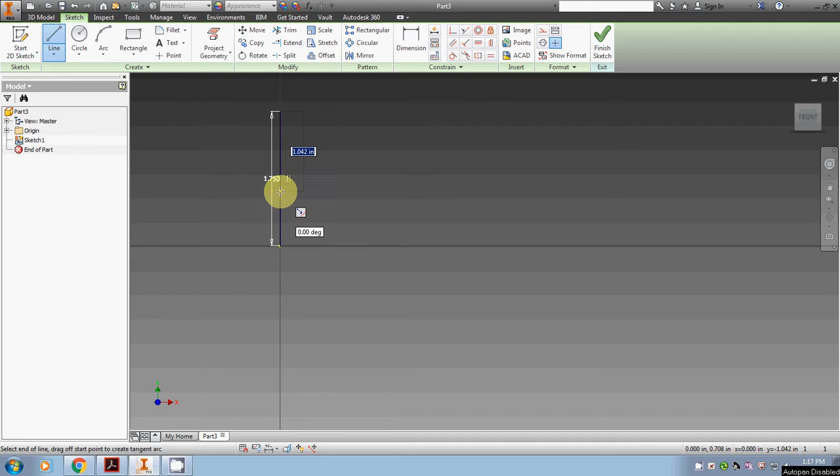So up 1 3/4, over a half, down an inch, over an inch, up an inch, over another half an inch, down an inch and a quarter, over an inch and a quarter, down a half an inch back to the axis.

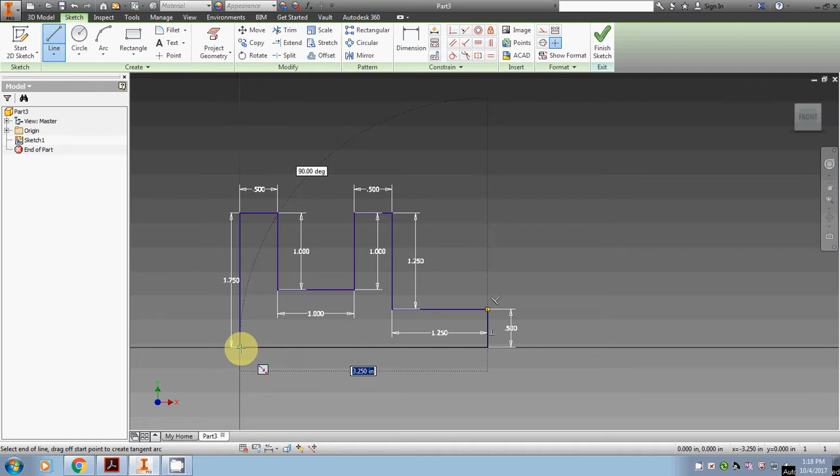Then close it off. Once we have that closed off, before we finish the sketch, I'm going to come in here and you'll see that it's fully constrained, so it can't accept any more dimensions. Alright, but I'm going to get rid of this 1 inch dimension here.

Click and delete it. Grab my dimension tool and dimension this overall length here instead. Hit the green check mark and we'll see it's still fully constrained. And we'll see why that's important here in a few minutes.

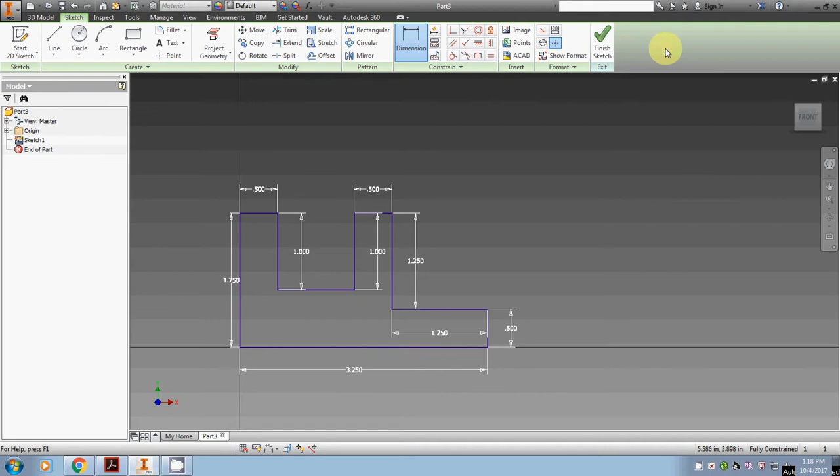So I hit finish sketch. Now I'm ready to extrude it, which is also called a feature. And to extrude it, I'm going to extrude it symmetrically at a distance of 2.5 inches.

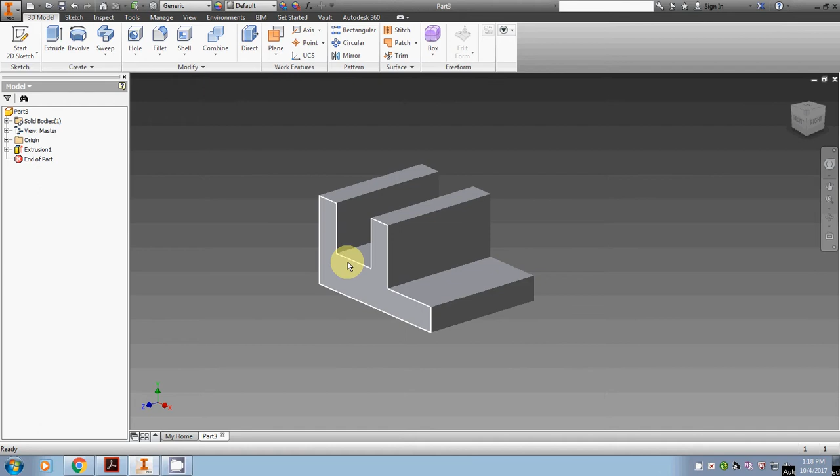Once I have that done, I'm going to go ahead and create another sketch on the face right here. Rotate this around. I'm going to grab a circle tool and I'm going to move my cursor along this line until I find the midpoint, which is green right there, and drag out the circle until I reach another endpoint.

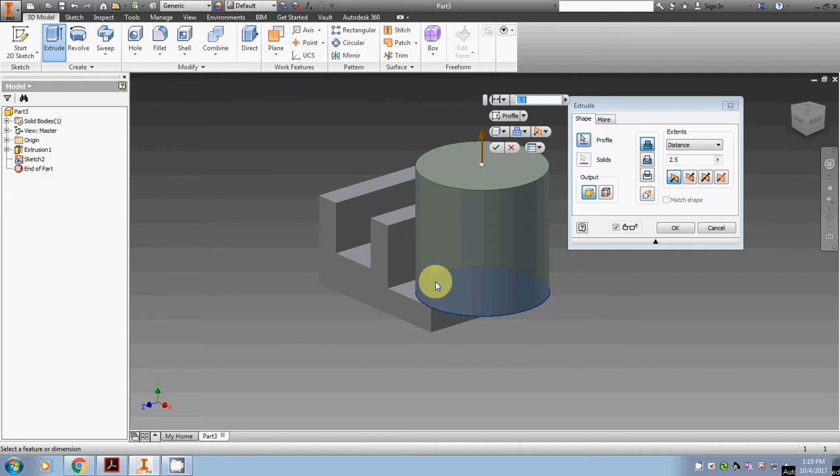So we'll say finish sketch. We'll extrude that. We're going to change the direction so it goes down, and we're going to make sure it says join. And type in a distance of 0.5 and click OK.

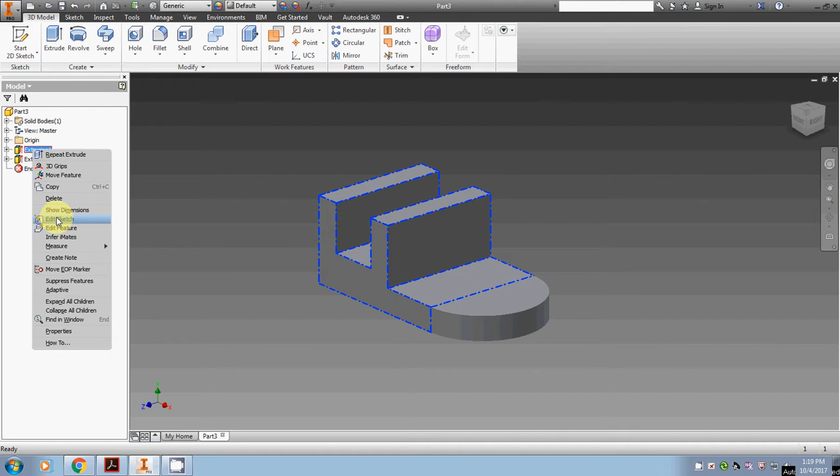Now the main point of this was getting to where we can edit this. So here's a simple part. If we realize we made this the wrong length, we can simply come over here to our first extrusion and say edit the sketch. Double click our overall length, and then we realized it's a 1/4 inch too long.

We'll make it 3. When I hit finish, you'll see that it shortens the part.

The same with coming over here to the same extrusion one, saying edit the feature, and we realized it's too wide. We can change that to be 2 and say OK. We'll see that it's narrower now.

So that's how you can go back and edit any part without having to delete the entire extrusion or the entire sketch. So now that we have that figured out, we can go ahead and finish up this drawing.

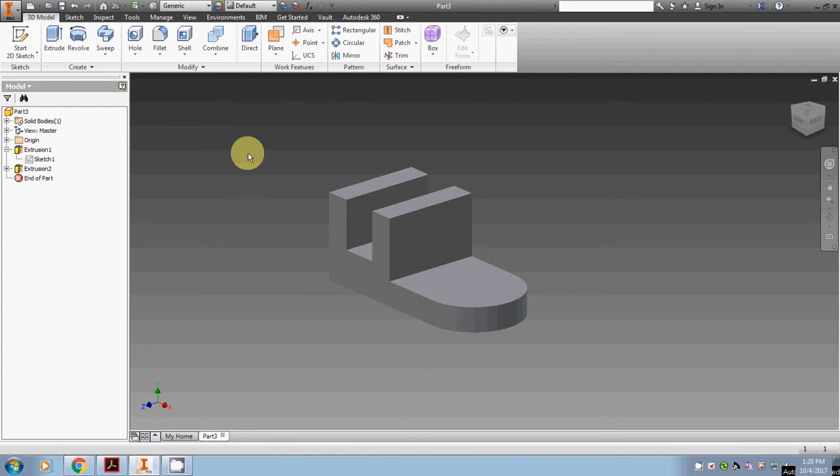To do that, we want to add a hole right here. We'll click hole. Once we have a circle we can reference, we do concentric.

We'll choose the plane. We'll choose the reference edge. That will center it. We'll choose the size of 0.75. We want it to go through all. Hit apply. And the last thing we want to do is cut a notch through here.

So we'll choose create a new sketch. Sketch on this face. Choose the line tool. Start in this corner. We're going to come over 1/2 inch. We're going to come down 3/4 inch.

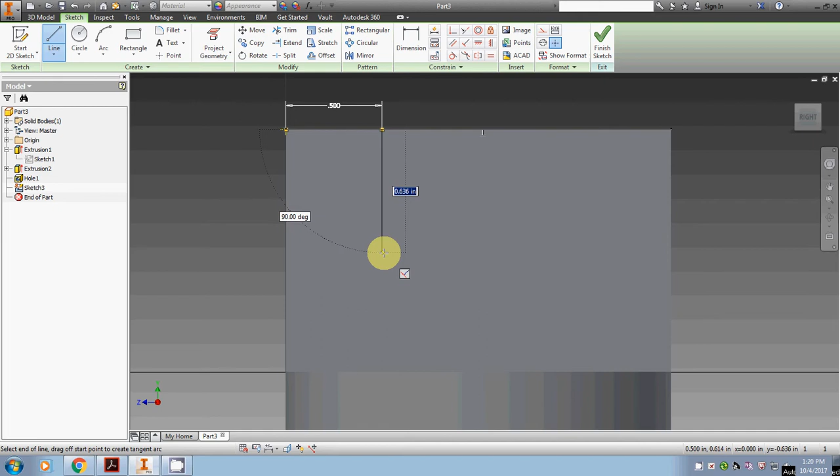And I don't know why it wants to keep going over here like this. I've had problems with that in the past here. So I'm going to get rid of that.

Line. I'm going to go to an isometric view to draw it. It seems to be okay when you do that. I'm going to come down. I'm going to make sure I'm at 90 degrees. Type in 0.75 there. It did it again.

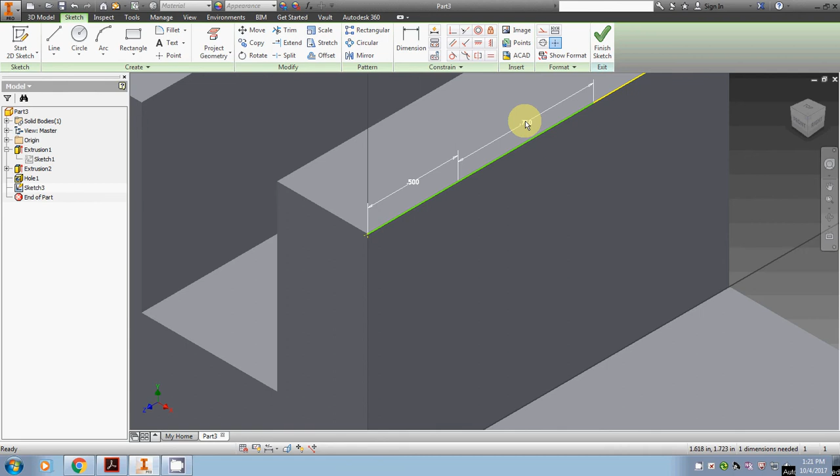So we're going to hit undo. I'm going to try again. I don't know why it wants to do that. There we go. I just hit tab and I locked that into 90 so it can't come over.

Alright, I'm going to go ahead and come across here 1 inch. I'll come back up 3/4 inch, and then I'm going to close off this. Alright, once I did that, I'm going to hit finish the sketch.

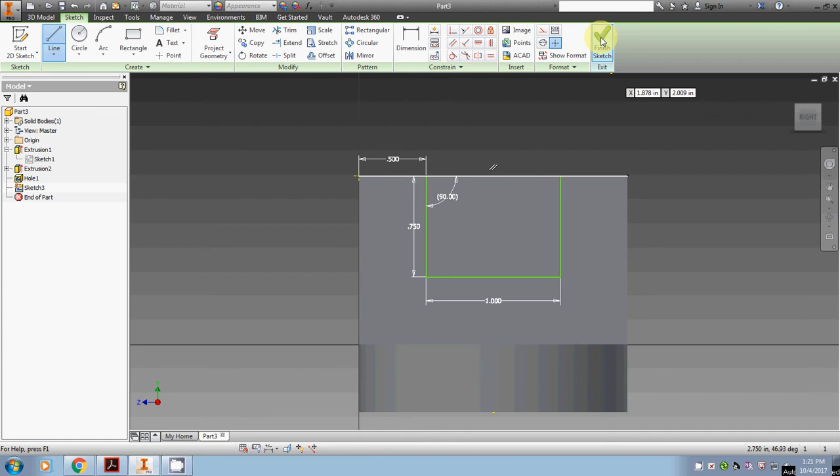I'm going to extrude that, and this time I'm going to cut. I'm going to choose all. The way it cuts through the whole thing, and click OK.

After we have that done, the last thing we need to do is assign this a property. To do that, and to do this anytime, we'll come over here to the part, which we haven't named this yet. Right click, go to iProperties, physical properties, and we can assign it a material. We're going to choose aluminum 6061.

Look at the global mass, this will calculate how much this part will weigh. Alright, you can see here it's not very heavy. Once you do that, hit apply, close, save this, and you're good to go.